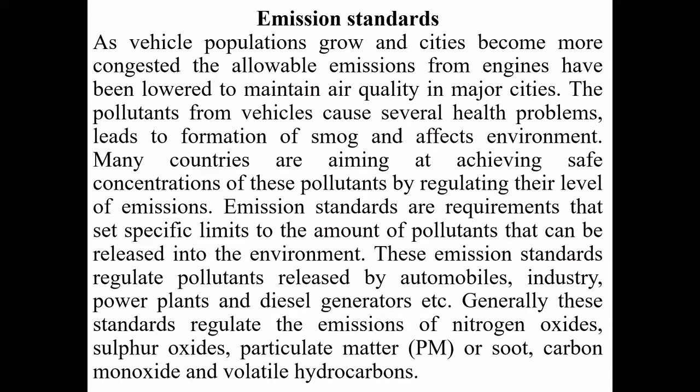Okay, before we go deeper into how the emission standards will support, for 3 to 4 years we are seeing the automobile industry is sick. And what are the reasons for the sickness of the automotive industry? Here 2 points play a major role. The first one is the technical aspects, which is nothing but emission standards for automobiles. That is what we are going to discuss in brief, that is Bharat Stage Emission Standards.

Another reason why the automobile industry is sick: there is a global economic slowdown, deceleration is there, and government policy also affects the automobile industry and its prosperity. And the foreign direct investment policy of our country will also influence. Above all, here we are going to discuss only the technical aspect, which is playing an important and major role in the automobile industry being sick.

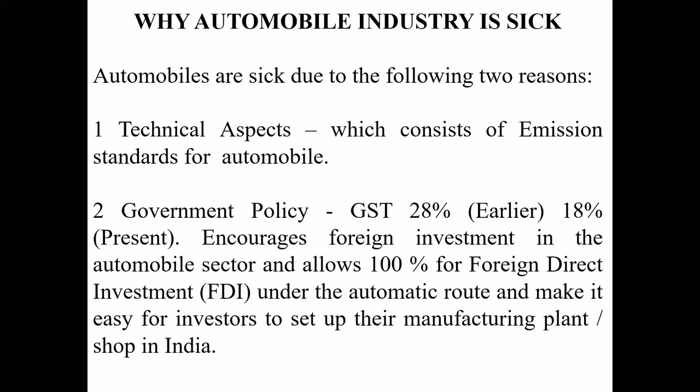Just one sentence I will tell you before we look further. For 2 years vehicle manufacturing has minimized, because the vehicles so far available in the market were manufactured to cater to the requirements of Bharat Stage Emission Standard 4. Okay, now 2020 June onwards, we are shifting from Bharat Stage 4 to Bharat Stage 6 emission standard limits.

Okay, now what are the requirements and what role will emission standards have in the control of pollutants in the atmosphere? Emission standards are the legal requirements governing air pollutants released into the atmosphere. The main objective of emission standards is to set quantitative limits on the permissible amount of specific air pollutants that may be released from specific sources.

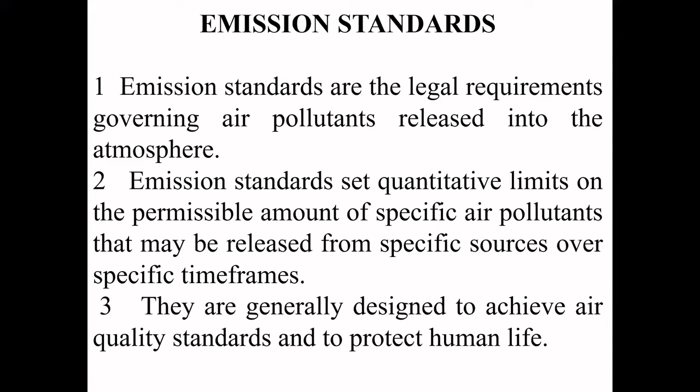What are the specific sources? Now we are concentrating on the specific source for our studies, the automobile emissions. Okay, and emission standards are generally and mainly designed to achieve better air quality standards and to protect human life from the diseases which are expected through air pollution.

And as far as the Bharat Stage Emission Standards are concerned, as I was just telling, we are following the European emission standards. And progressively stringent norms have been rolled out since 2000. The first Bharat Stage Emission Standard came into force in the year 2000. From then onwards, a number of stringent norms and standards have been enforced in India. And all the new vehicles manufactured after the implementation of norms have to be compliant with the then regulations.

Since October 2010, Bharat Stage 3 norms have been enforced across the country. And one more point we can see: in April 2010, partial enforcement of Bharat Stage 4 also came into force. Okay, how partial? How was Bharat Stage 4 partially enforced?

Only 13 major cities of the country have been enforced with the Bharat Stage 4 emission control standard, and the complete country is being enforced with Bharat Stage 4 from 2017 onwards. So there is a gap between 2010 and 2017: 2010 Bharat Stage 3 and 2017 Bharat Stage 4.

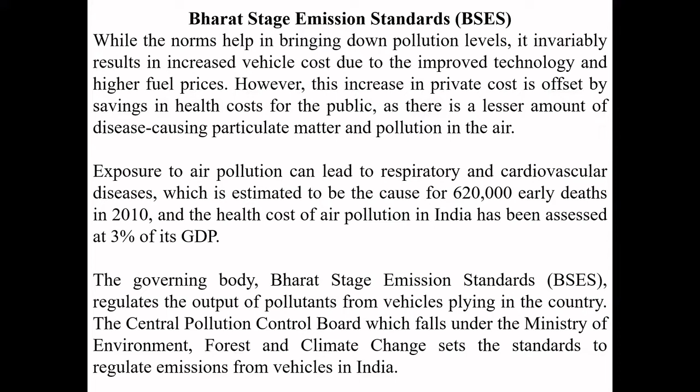The Bharat Stage emission standard in India is controlled by the Central Pollution Control Board, which falls under the Ministry of Environment, Forest and Climate Change. Then how will the emission standards work, and what are the major norms or regulations in each Bharat stage: BS1, BS2, 3, 4? These are all indications of the iterations, the development of the emission standards.

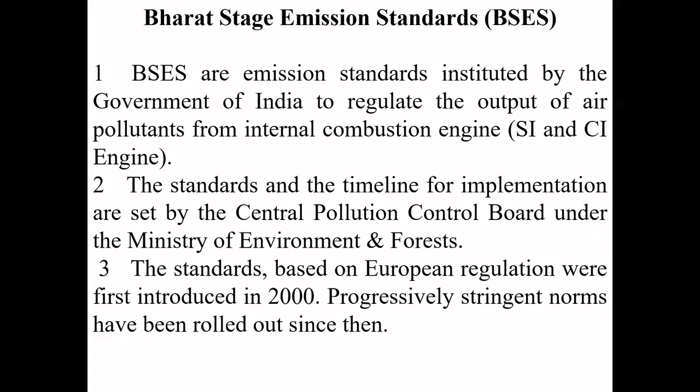The Bharat Stage emission standards are emission standards instituted by the Government of India. The standards and the timeline for implementation are set by the Central Pollution Control Board. The emission standards we follow in India are all based on European regulations. The first Indian standard based on European regulation was officially enforced in the year 2000. Since then, a number of stringent norms have been rolled out.

Then BS2 and BS3, Bharat Stage Emission 2 and 3, were introduced in 2005 and 2010 respectively. The Bharat Stage 4 emission standard was introduced in 2017, after a gap of 7 years between BS3 and BS4. The BS6 emission standard is the sixth iteration of emission norms, and it is a substantial leap in terms of reducing pollution compared to the outgoing BS4 standard. BS5 has been skipped to move to better emission norms.

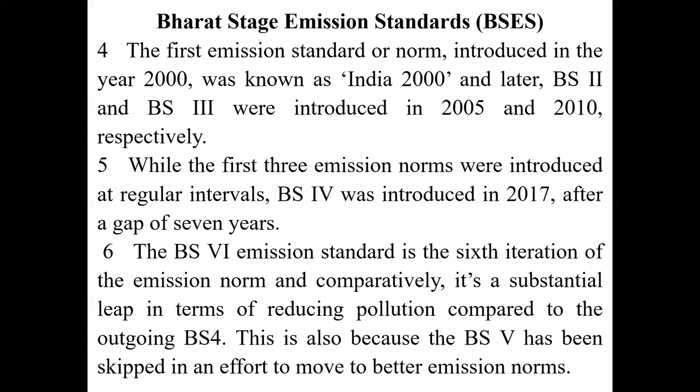So what is BS4? What are the special features of BS4? What will BS4 enforce? What are the pollutants controlled in this? And what are the changes in the automobile manufacturing industry as far as BS4 emission standards are concerned? BS4 will have standards for engine performance, its pollution and its significance.

The Bharat Stage Emission Standards, the governing framework for emissions from all types of vehicles in the country, from two-wheelers to heavy-duty defense vehicles, introduced the first emission norm in the year 2000. That was BS1, and BS2 and BS3 were introduced in 2005 and 2010. BS4 was partially implemented in 2010, but the country is enforcing BS4 from 2017 onwards. BS4 has stricter emission norms compared to BS3.

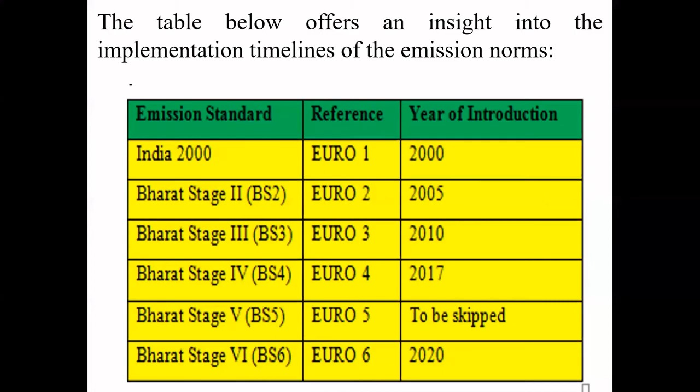And also how human life will become more comfortable by having the BS6 norms. As far as the requirements are concerned, whatever automobiles are manufactured to meet the norms of BS6 have to follow the same. Not only the manufacturing, even the type of fuel used for the vehicles meeting the norms of BS6 is also changed. And around 600 to 700 stations are using fuels which meet the requirements of Bharat Stage 6.

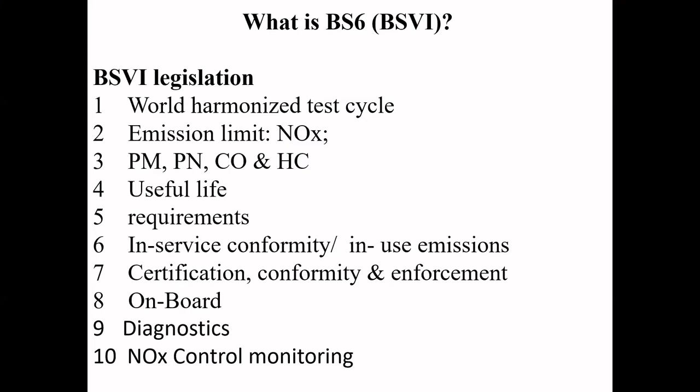Okay, and another important special feature of this BS6 is on-board diagnostics. We will come to know which portions are not working in the engine, and which pollutants are exceeding the set limits of BS6. Okay, and continuous monitoring of NOx is made available. Now we have seen which pollutants are controlled, and now in what way manufacturing of vehicles is changed to meet the requirements of BS4 and BS6.

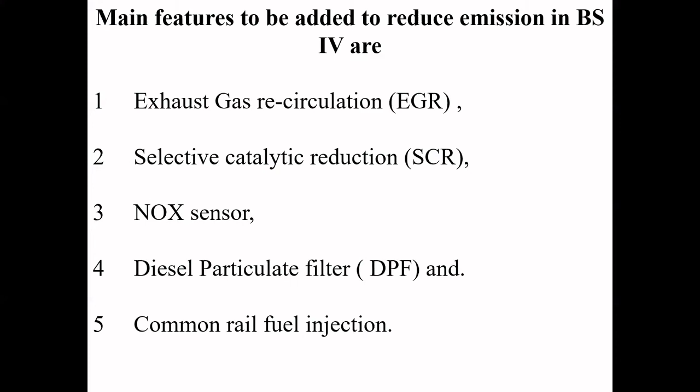As far as BS4 is concerned, as we already discussed in emission control systems, exhaust gas recirculation is made available. Selective catalytic reduction is also made available. And the NOx sensor senses how much NOx is found at the exhaust of the engine. Diesel particulate filter and common rail fuel injection system. Now we are shifting from BS4 to BS6, so we should see the difference between BS4 and BS6.

See, one point let us remember. BS4 and BS6 are emission norms that set the maximum permissible levels for pollutants emitted from a car, a two-wheeler or any heavy-duty engine. Compared to BS4, BS6 emission standards are stricter, while manufacturers use this change to update their vehicles with new features and new safety standards. The most significant change comes in the form of stricter permissible emission norms.

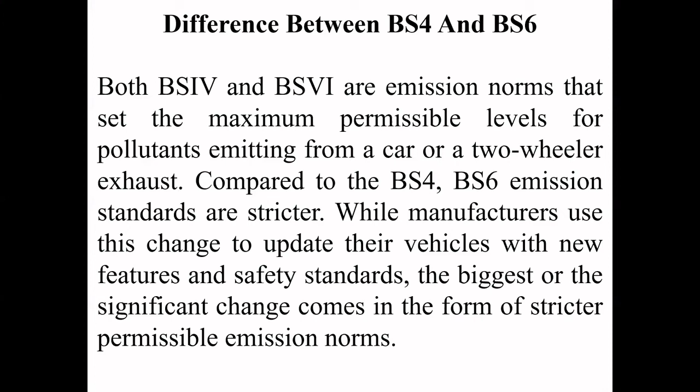And the major difference between BS6 and the outgoing BS4 is the type of fuel used. As far as the fuel used in BS6 is concerned, the fuel contains 5 times fewer sulfur traces, that is 10 parts per million, compared to the sulfur traces in BS4, that is 50 parts per million.

Okay, and on similar lines, if we compare the NOx, that is nitrogen oxide traces, as far as BS6 is concerned, this will be brought down by a staggering 70% for diesel engines and 25% for petrol engines compared to BS4. And we will see in the table also what the differences are between BS6 fuel and BS4 fuel.

BS6 brings along plenty of changes. Most significant is, as I was telling, while the engine is in operation we could have a view, as provision is made for on-board diagnostics, so the driver is able to minimize whatever faults are noticed in BS6 vehicles. That flexibility is given by the manufacturer, which meets the requirement of BS6 norms.

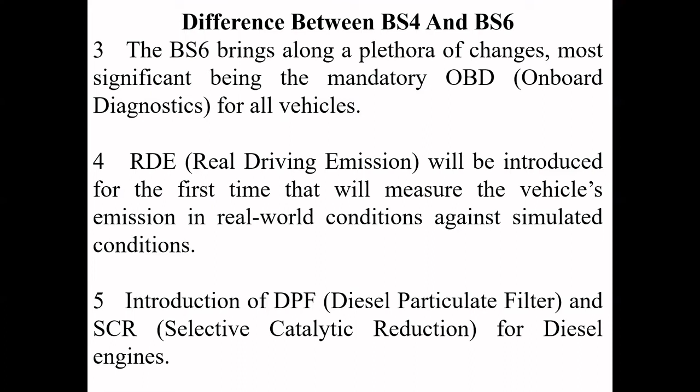Okay, and real driving emissions will be introduced for the first time, which will measure vehicle emissions in real-world conditions against simulated conditions. Diesel particulate filters and selective catalytic reduction for diesel engines are introduced for the first time as far as BS6 is concerned.

As I was telling, I will show you the table as far as the type of fuel is concerned in petrol engines and diesel engines. If we look into the petrol engine first, the comparison is made of pollutant gases in BS6 and BS4. As far as nitrogen oxide is concerned, in BS6 the limit is set at 60 mg, whereas in BS4 it was 80 mg.

Okay, the particulate matter limit in petrol passenger vehicles in BS6 is 4.5, which was not a limit in BS4 vehicles. So that is an indication that, whether it is petrol or diesel, compared to the fuel used in BS4, a much purer quality of fuel is going to be used under BS6 emission standards.

In a similar way, for diesel passenger vehicles the table comparison is given. You can see the table. Nitrogen oxide in BS6 vehicles is 80 mg, whereas in BS4 it was 250 mg. So the quality of diesel has to be changed enormously to meet the requirement of BS6 emission standard norms.

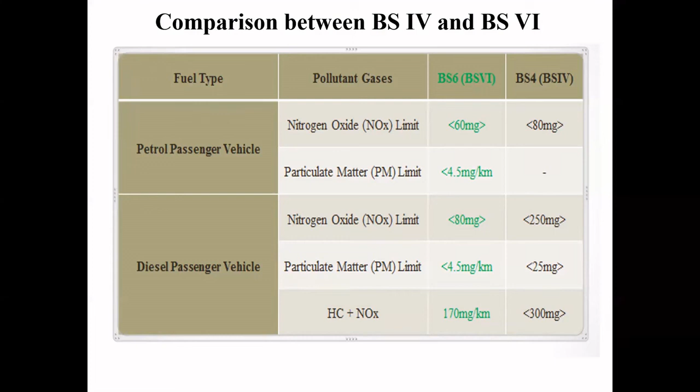Now we look into the features of the BS6 emission standard. Bharat Stage 6 compliant petrol vehicles are required to be 25% cleaner by reducing NOx, that is nitrogen oxide numbers, from 80 mg per kilometre to 60 mg per kilometre, which we have already seen in the previous table. For diesel cars, the BS6 norms aim at reducing three pollutants, which include volatile hydrocarbon plus NOx, particulate

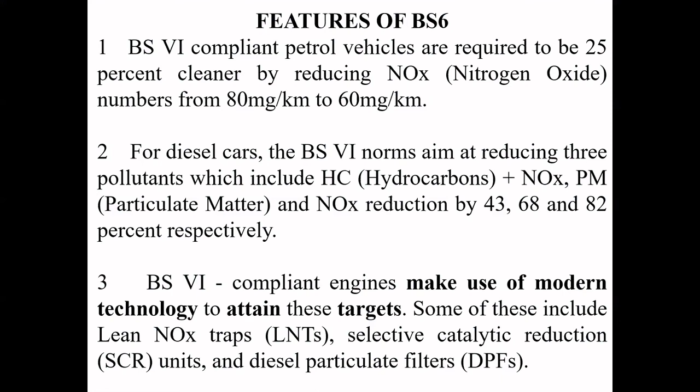Then, BS6 compliant engines make use of modern technology to attain these targets. Some of these include NOx traps, selective catalytic reduction units, and diesel particulate filters; whatever I am naming, these are all incorporated while manufacturing the vehicle itself to meet the norms of BS6.

Okay, and manufacturers are presently in the process of phasing in their BS6 cars by January or February 2020. And hereafter, whatever vehicles are manufactured, they are meeting the norms of BS6 regulations.